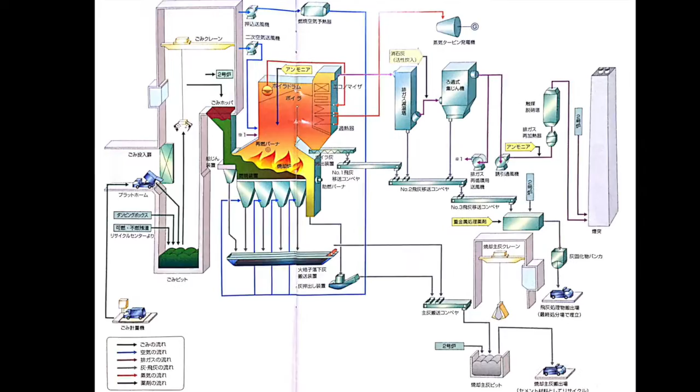Garbage discarded by households and businesses is transported into the facility by garbage trucks, which are weighed to determine the amount of garbage they are carrying. The garbage is dumped into a waste pit big enough to hold 5 days' worth of garbage. A crane installed above the pit grabs and spreads out waste so it can be incinerated at a constant pace. Waste is moved by the crane from the pit into the hoppers for a stable feed into the furnace.

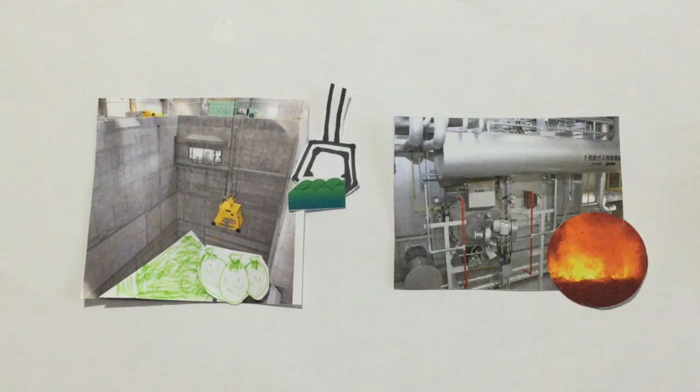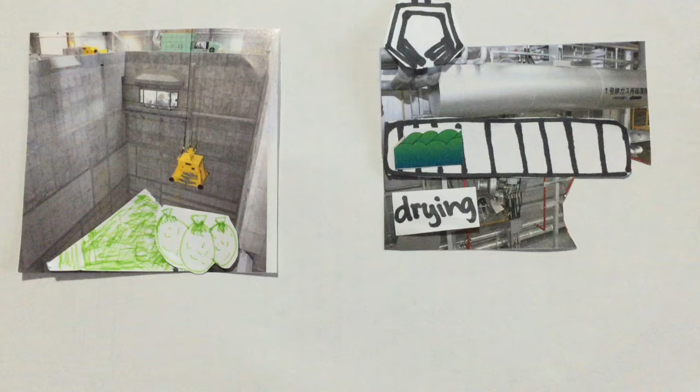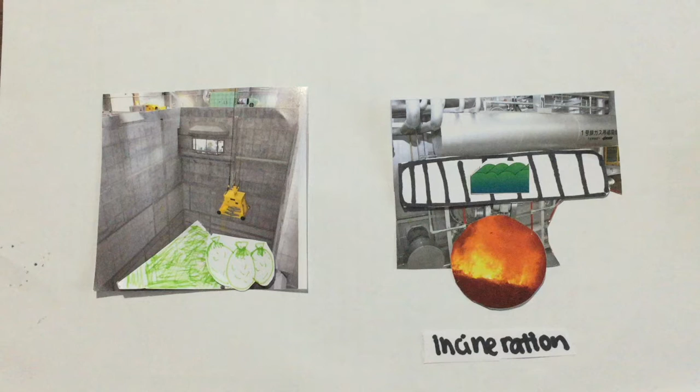Inside the furnace, waste is carried by stokers moving at a fixed rate so that waste can properly burn. The incineration process is divided into drying, incineration, and secondary incineration stages. First, waste is carried to the drying stoker to dry up the moisture. It is then carried to the incineration stoker to be incinerated at more than 850 degrees Celsius, which breaks down dioxins and efficiently incinerates waste. Lastly, waste is completely incinerated into ash so that no burnable residue remains on the stoker.

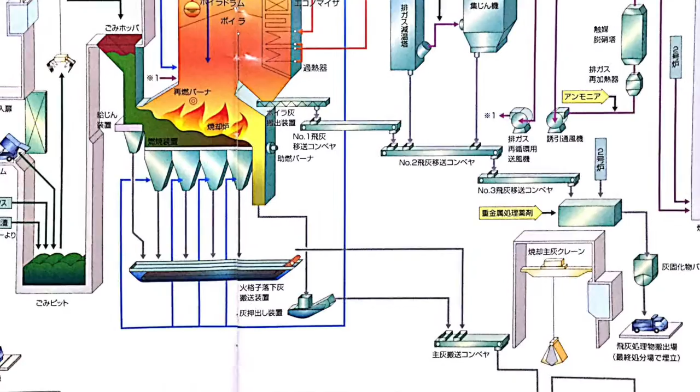The ash resulting from waste incineration is first cooled with an ash discharger and then transported to the ash pit. It is then taken to cement factories to be recycled into cement. The effective use of incinerator ash for cement could conserve space at landfill sites and helps build a recycle-oriented society.

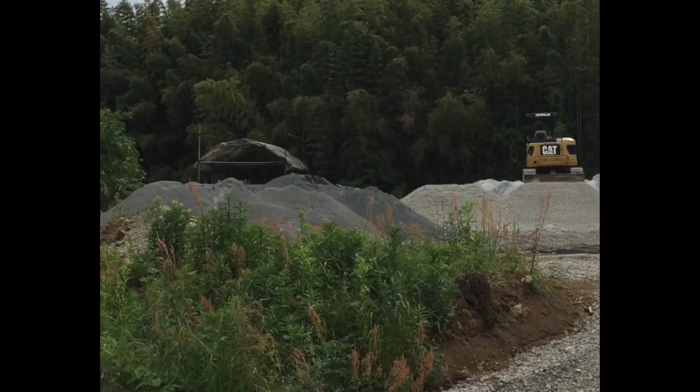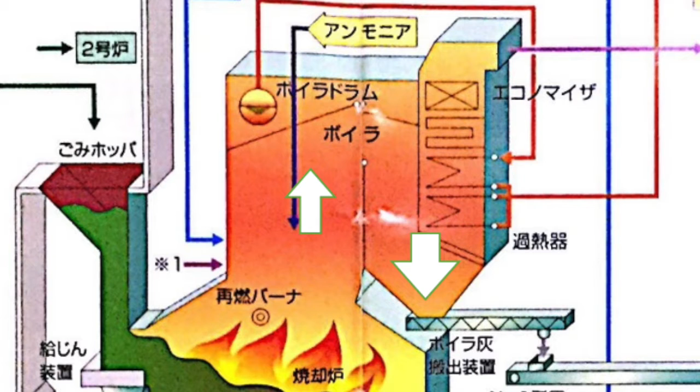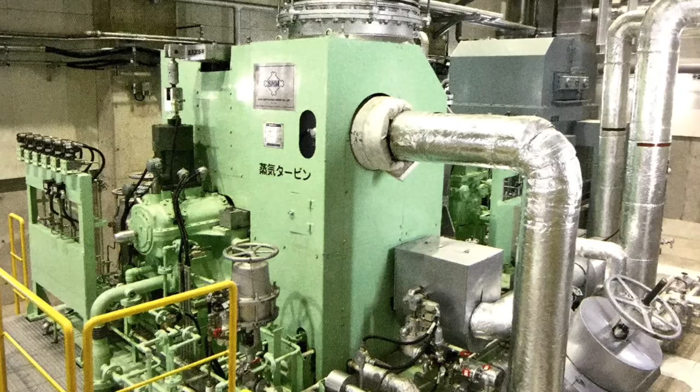The gas generated when waste is burned is called flue gas. It must be treated before it is released into the atmosphere. Heat is collected from flue gas by a boiler and economizer, which is used to generate steam of 400 degrees Celsius by a boiler. The steam is then fed into a steam turbine to generate electric power. Electricity generation can reach up to 4,000 kilowatts, enough to power 10,000 households. The generated electricity is used to operate equipment in the facility, while any surplus power is sold to the local power company.

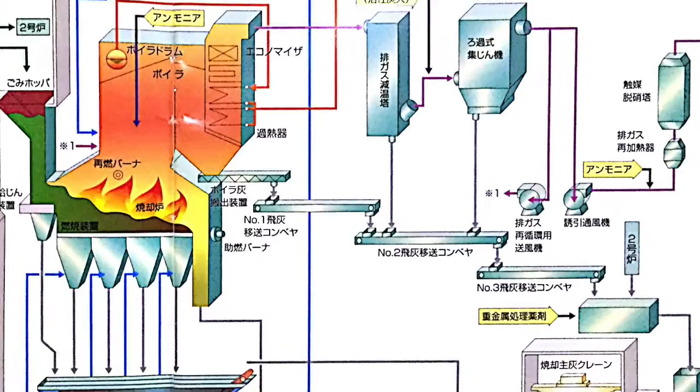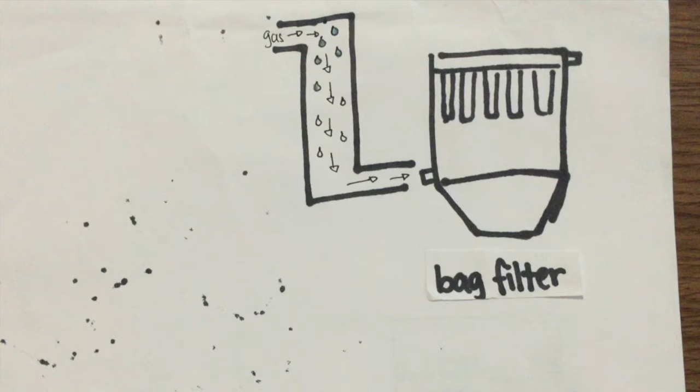Flue gas is fed into a cooling tower where it is sprayed with water to quickly cool its temperature to about 170 degrees Celsius. This rapid cooling effect prevents dioxins from reforming. After that, the gas is fed into a bag filter, where hydrogen chloride and sulfur oxides are removed. The bag filter contains a cylindrical filter that captures dust and dioxins.

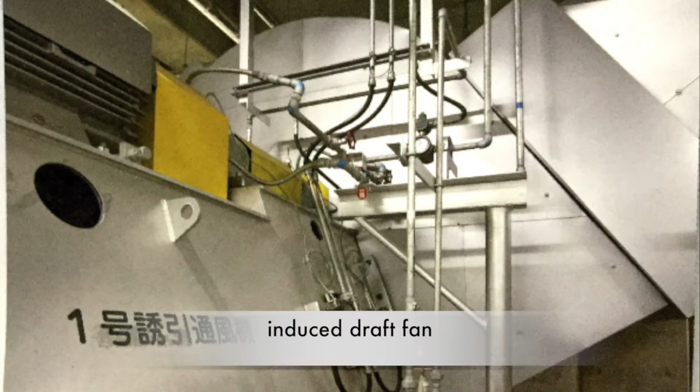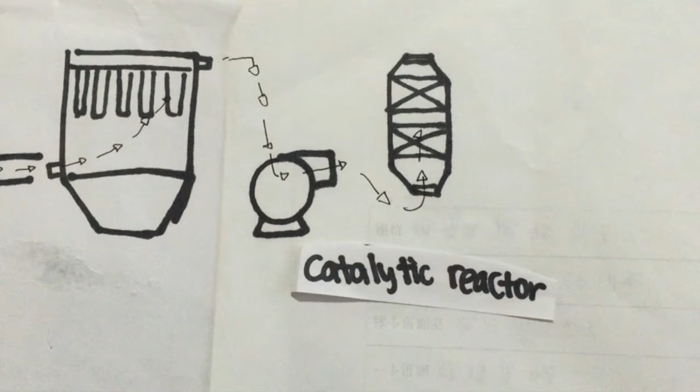An induced draft fan is located at the end of the process to promote the movement of air through the bag filter. Next, the flue gas is fed into a selective catalytic reduction tower to remove nitrogen oxides and any leftover dioxins. The clean flue gas is released into the atmosphere through a 59-meter tall smokestack.

As lifestyle changes, are there any changes with the waste received?